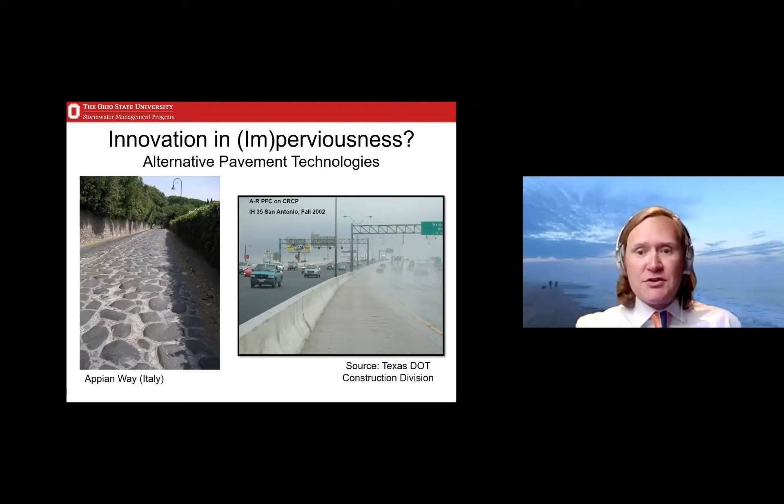So if we can think about ways to change some fraction of those into perviousness, that can do a lot of benefit for things like stormwater control. The picture on the right is an example of that, particularly for a highway. I promise you it is raining on both sides of this Jersey barrier. This is a porous friction course overlay, a porous asphalt overlay on a highway down in Texas, and then a standard asphalt highway on the right-hand side. This gives you an idea of some of the other ancillary benefits of porous pavements, related particularly to splash and spray and hydroplaning reduction.

What we're really going to talk about today are full depth permeable pavements, pavements that are entirely permeable and allow water to infiltrate through the surface, typically conveyed to a sewer network through an underdrain.

I've shown five different types here, all with slight variations in the maintenance that may be required. The two on the left are more uncommon, so I won't talk about them much today. For instance, turf reinforcing grids might give you a grassed parking lot that you actually have to mow, which is definitely dissimilar to a traditional asphalt or concrete surface.

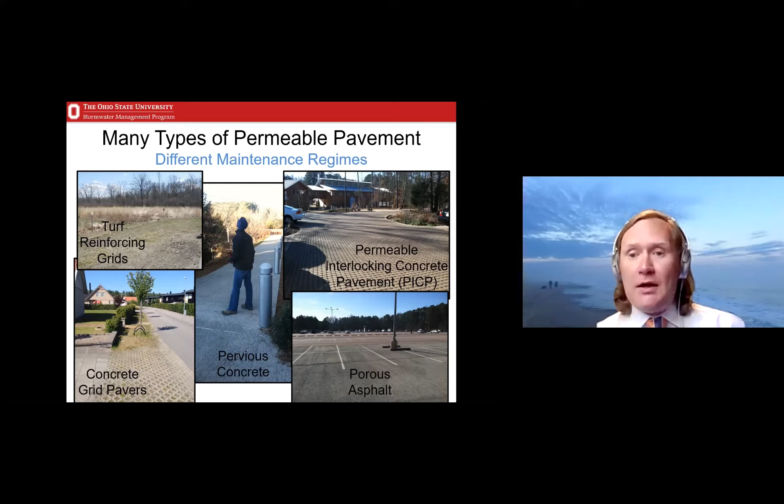But the thing all of these have in common is that they contain pore spaces that allow water to pass vertically through the pavement, as opposed to being transferred as surface runoff to storm sewers through inlets and pipes. A typical cross section for a permeable pavement is shown here.

Essentially, it's a porous surface of some sort. In this case, these are pavers with interstitial spaces in between that are porous. Porous asphalt and pervious concrete both have similar pore spaces. Underlying that are a series of aggregate layers, typically open graded aggregate layers, which allow for water storage.

There's tremendous porosity, typically somewhere around 40% in these aggregate layers, which can be used sort of as subsurface aquifers. As engineers, we can design for peak flow mitigation or for infiltration into the underlying soil and groundwater recharge. We can also get some minor evaporation occurring, and through this cross section we're also getting treatment of the water and improvement of water quality versus typical urban street corridors that are impervious.

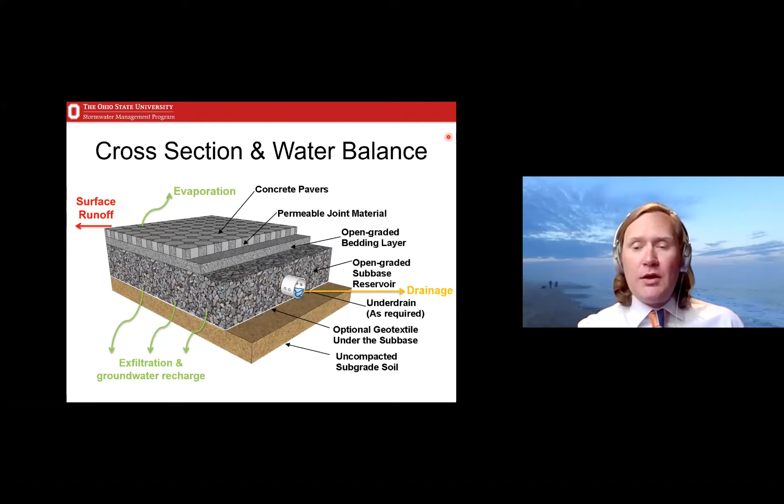The treated water often heads out of the underdrain. Here in Ohio we have primarily clay soils, so we almost always have an underdrain with these systems. But really the fraction of the runoff water balance we're trying to avoid is the surface runoff piece. Surface runoff starts to occur when the pore spaces in these systems get debris and material that prevent water from passing through them, which is what we're trying to avoid or remediate when we maintain porous pavements.

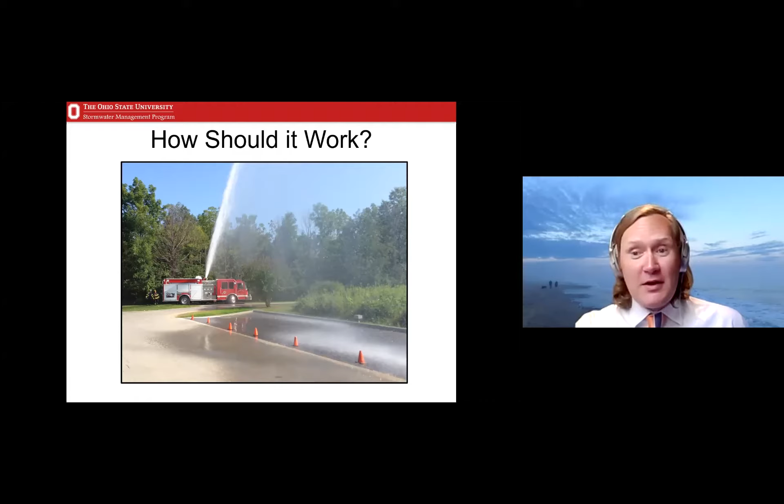So right after construction, how should these things work? We called up our local fire department at this permeable pavement site, and they were excited to use their hose and spray lots of water on our permeable pavement. In terms of infiltration rates and how fast water can move through the pavement, it's many hundreds of inches per hour, well above any typical rainfall intensity anywhere in the world. When newly built, these should pass water just about as fast as you can measure. Then with time, as I'll show you, these infiltration rates slow.

As you maintain them, you'd expect infiltration rates to increase following maintenance efforts. So what's the reason infiltration rates decline with time? If you think about this stormwater control measure, the system is acting as a filter for sediment. We have dirty runoff coming off a watershed draining onto the permeable pavement, and even rainfall contains some sediment. So even if it's just treating direct rainfall, you'll still get clogging over time from windborne dust and debris pushed onto the pavement.

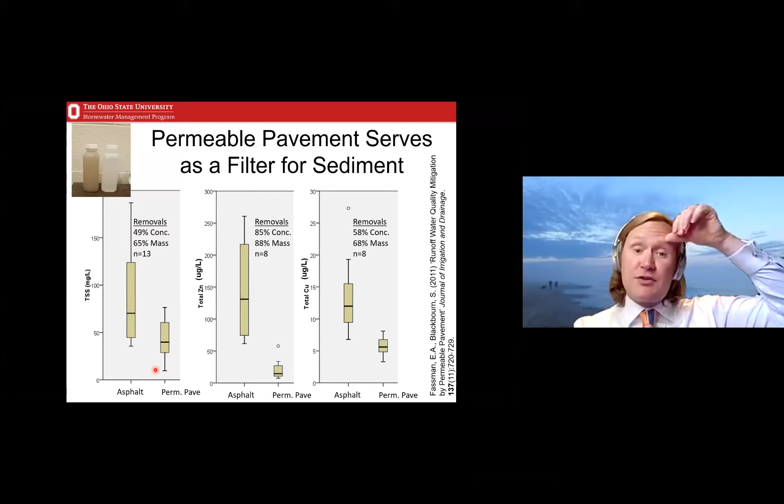You can see here some examples, from Elizabeth Fassman's work—she's a previous speaker on this series. This is traditional asphalt pavement, and then the effluent from a permeable pavement in Auckland, New Zealand that she monitored. You can see the effluent from the permeable pavement is much cleaner, because it's acting as a filter, trapping sediment in the cross section. That's naturally why we see a decline in infiltration rate as a function of time with all types of permeable pavements.

In summary, with time and without maintenance, the pore spaces in these porous pavements—be it pervious concrete, porous asphalt, or permeable interlocking concrete pavements like the bricks with interstitial spaces you see here on the bottom—regardless of the type, they will clog up over time.

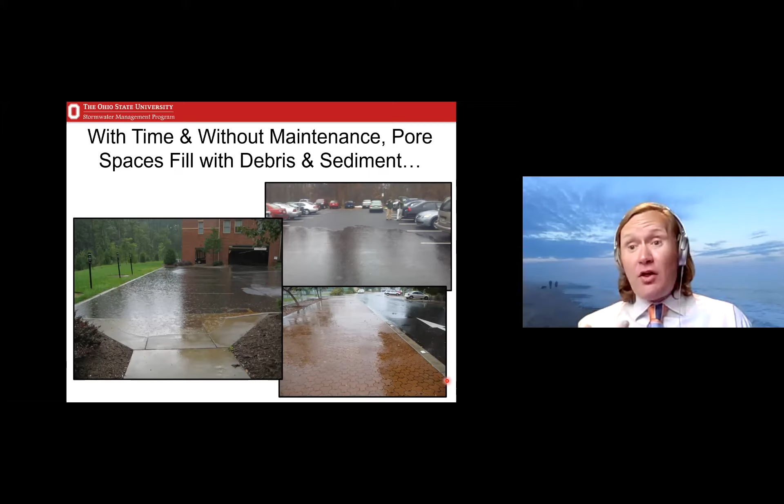And so we do need to have a proactive maintenance regime that is built such that we're able to ensure the hydraulic function of these systems over time. Because if we're relying on them for things like CSO control or SSO control, and they clog, then there's going to be all that water again heading to the CSO, for example.

So what I want to hammer on first is how design of these porous pavements affects performance. It affects how they function in terms of runoff reduction, particularly, and it also affects maintenance.

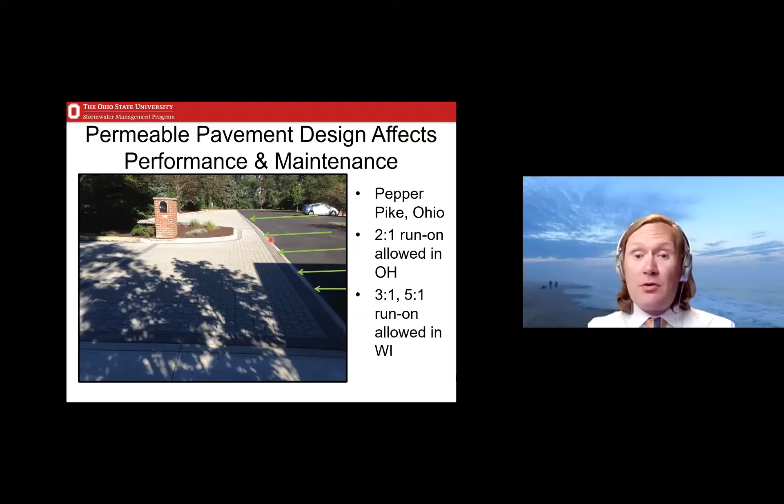So this is a picture of a typical porous pavement design here in Ohio. We have our permeable interlocking concrete pavement, which I'll abbreviate PICP, on the left here, and then a traditional asphalt portion of the parking lot. It's canted from right to left in this picture, so we have runoff entering onto the PICP.

We're allowed to have 2 parts impermeable to 1 part permeable here in Ohio, and that's what's called our run-on ratio. So a 2-to-1 run-on ratio means 2 parts impermeable to 1 part permeable. Other places in the country go even higher - Wisconsin can go up to 3-to-1 or even 5-to-1 in certain cases.

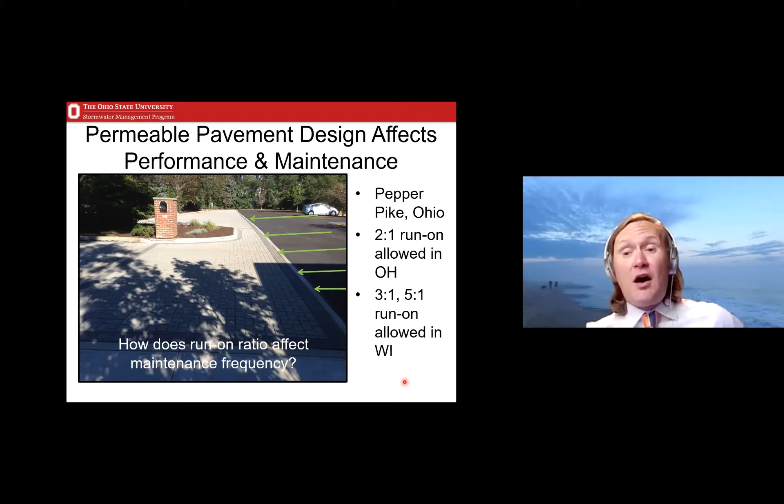And obviously, as you push more and more water onto the pavement, if that runoff contains sediment, which we all know it does, that's going to affect the rate at which these pavements clog. So this run-on ratio is of major importance to maintenance frequency, and I'm going to touch on how that affects things in just a few slides.

These 4 sites, we instrumented and did intensive monitoring of these sites. Actually, back during my PhD work, we collected the water balance on these systems over 18 months of monitoring and about 75 to 80 storm events. So we really had a good idea of where the water was going and how the systems were functioning.

And so, to jam a good portion of my entire PhD into 2 slides, here we go. I'm going to summarize the water balance for these 4 sites: Perkins Township, 2 sites at Willoughby Hills, and then Orange Village here at the bottom. And what I really want to hone in on as the primary design factor of interest is this idea of run-on ratio.

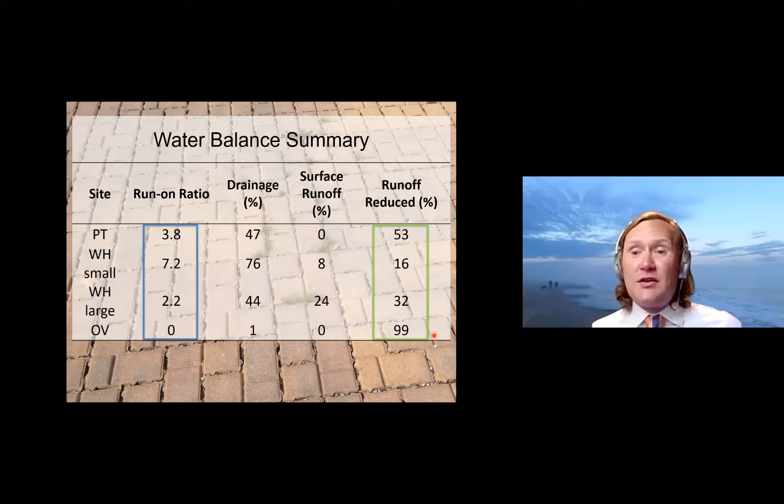What you can see is that Orange Village was only treating direct rainfall, so had a run-on ratio of 0. And what that directly resulted in was 99 out of 100 raindrops that fall from the sky being abstracted or reduced and kept out of the storm sewer network. So we had a lot of infiltration into the underlying soil and evaporation back up into the atmosphere.

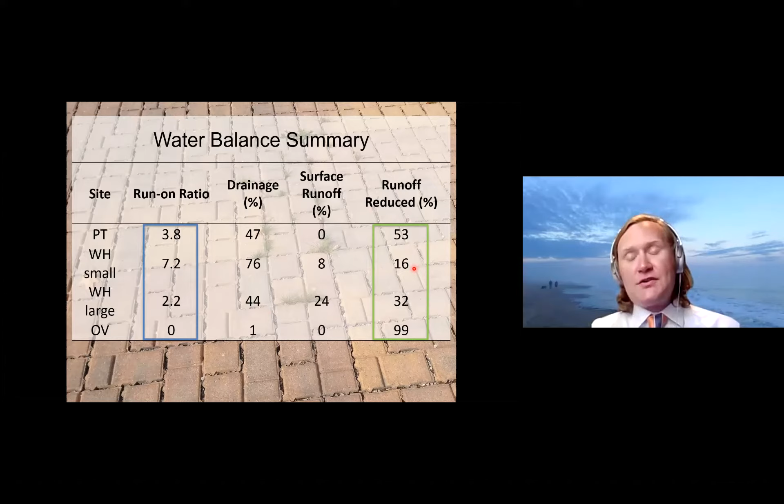The other thing you'll note is as the run-on ratio increases to 2.2, to 3.8, and then to 7.2 at the highest run-on ratio, you can see there's concurrent decreases in the amount of runoff that we've reduced. So as that ratio goes higher and higher, typically the runoff reduction is going to go lower and lower, just because we're putting more water through the system and hydraulically taxing it more.

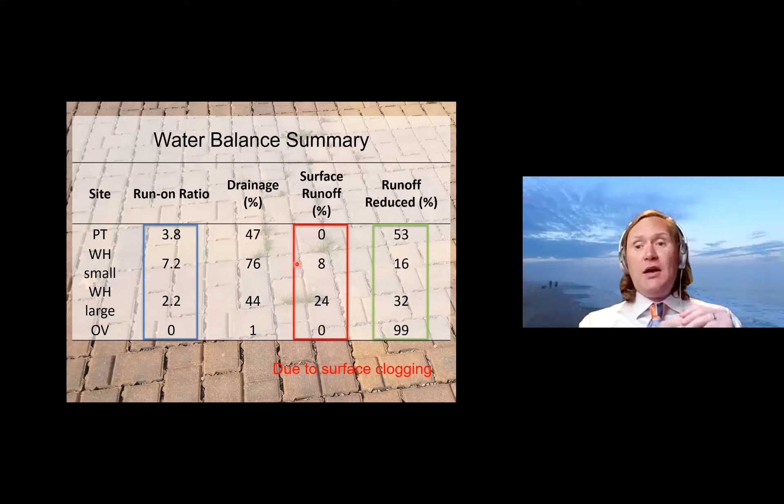The other thing that happens due to surface clogging is that we end up with more surface runoff as a function of the total overall water balance across all of the rainstorms that we monitored. In this case, we had up to 1/4 of the runoff at one of our sites that left the pavement as surface runoff. And that's the part of the water balance we really want to try to avoid because it's not really being treated - it's acting as an impermeable pavement at that point.

So I can come back and touch on run-on ratios and designs of these systems a little bit more in the questions if there's interest. There are some other interesting findings here that I won't touch on, just in terms of keeping on time.

I wanted to make the point about what happens if you practice gross neglect with these systems over a long period of time. These data were collected with folks over at Luleå University of Technology in northern Sweden, about where Sweden and Finland come together, way up near the Arctic Circle. These were two porous asphalt pavements we studied, one in Gammelstad and one in Haparanda, built back in the mid-90s, so they're quite old at this point.

You can see they had measured how fast the water moved through the pavement, what we call surface infiltration rate, at construction, roughly 500 to 1,000 inches per hour. They measured it at several points throughout the lifespan of each pavement, and these two points were when I was there for the testing. There's not a lot of data here, but when you fit a trend through this, it looks linear, but in fact this is a log scale on the y-axis, so we have an exponential decay happening in surface infiltration rate. If you really want the equation and want to get super nerdy, you can look here at this particular equation.

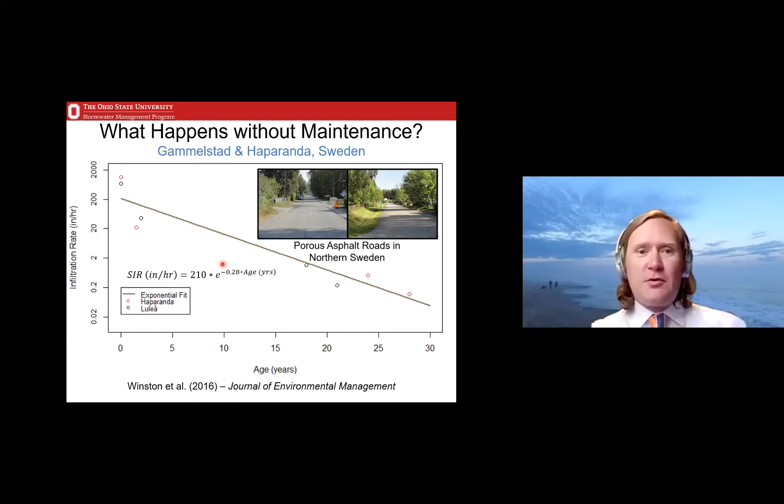So over time, if you don't maintain them, essentially what I'm trying to say with this slide is the infiltration rate will go nearly to zero. That's what we found. By the time we were there, we were well less than 1 inch per hour of surface infiltration rate. And measuring that is best done by a graduate student with lots of time on their hands, not someone with lots of other things to do. It's quite a boring thing to sit and watch, if you can imagine.

One other case study I want to give you relating design to performance is this Meijer store we worked on here in Columbus more recently. Traditional Meijer, very much like what you might have in the Twin Cities. We retrofitted a bioretention cell in one part of the parking lot, the watershed shown in green, and the bioretention cell here in the dot. Adjacent to that, a permeable pavement with a similar watershed draining to it, shown in purple.

The thing that was really interesting about this particular site is that we had an extremely high run-on ratio, 27 to 1. I don't often do this, but I'm going to beg right now. I'm going to beg you to never, ever push the run-on ratio this high, because this just flat failed. I wanted to show you there is a point at which you can push things to the point of failure, and we kind of did it in this particular study.

So we also collected data on maintenance at this site, in this case over the first 18 months after construction. You can see our surface infiltration rate data. We collected these every 3 months with the exception of the winter period. Again, as we look at the decline in infiltration rates here, this decline is again approximated by an exponential decay.

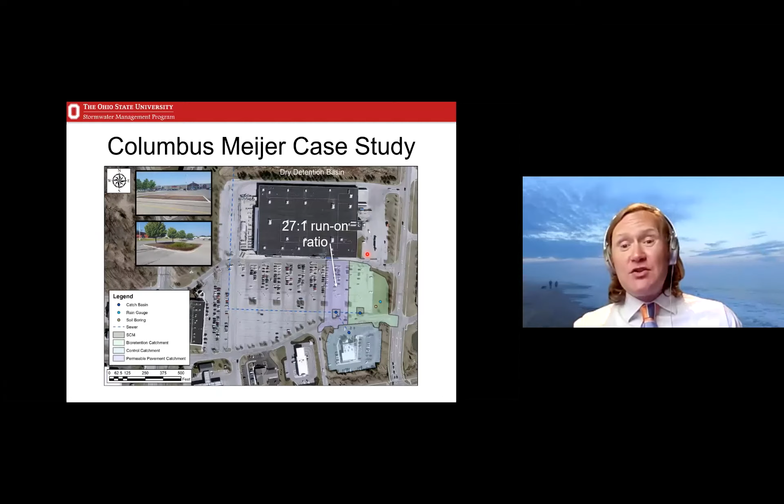In this case, the exponent on the exponential decay is quite a bit higher, and we think that's related to this much, much higher run-on ratio of 27 to 1. The porous asphalts in northern Sweden were just treating direct rainfall, so they clogged much, much less quickly. But this site really had clogged to the point of being fairly heavily clogged, less than 10 inches per hour within 18 months, and we'd done no maintenance over this period.

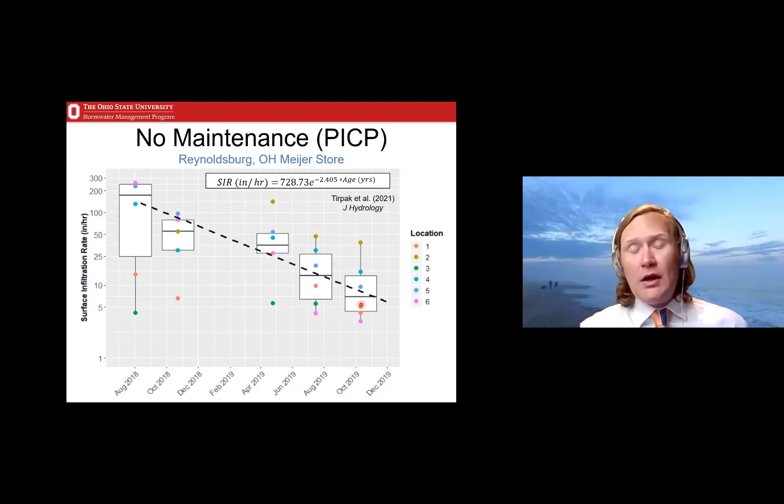So you might ask, how does this clogging affect the performance of the pavement? By the way, we've seen exponential decays in our research in porous asphalt and in permeable interlocking concrete pavements. John Sansalone down at University of Florida has seen it in pervious concrete as well. So we think this exponential decline is the way to model this if you're interested in modeling clogging of porous pavements.

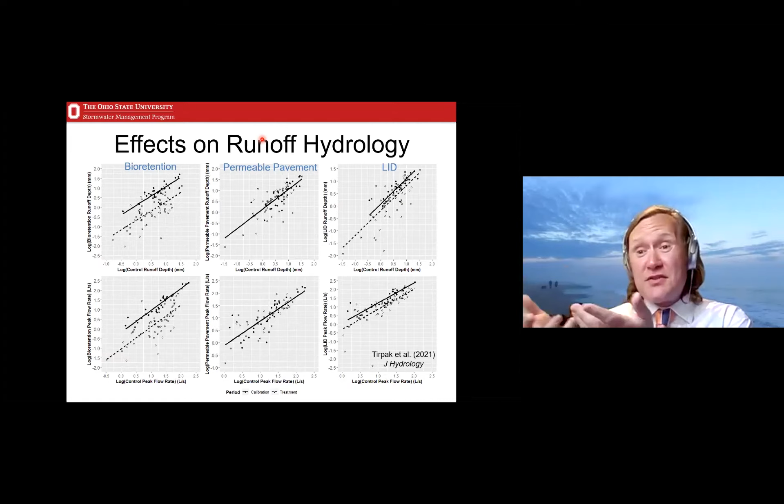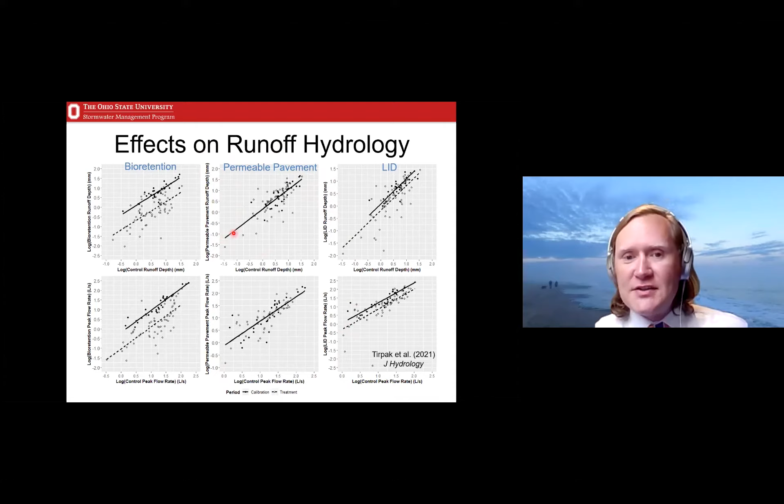Those of you who have been looking at the permeable pavement insets here, you're like, where did the dashed line go? There's no dashed line. In fact, the dashed line sits right underneath that solid line. In other words, there was no effect whatsoever over the first 30 months after construction. We could not tell that the permeable pavement was there. Hydrologically, it made no difference because the run-on ratio was so high, the system clogged very quickly, and it just was unable to function. So again, please do not push the run-on ratio this high. Please, please, please, please, please. It's not worth it. It will clog very quickly.

All right, so based on this and some other studies that I'm not going to cover for lack of time, we've come up with a recommended schedule of routine maintenance, a scheduled basic maintenance of porous pavement based on a lot of these studies. Most of the design guidances out there from various states recommend a static maintenance frequency - once a year, twice a year, 4 times a year - regardless of what the engineer chooses as the particular design. What we really recommend is relating this to run-on ratio because we think this is the critical factor for how fast these systems clog.

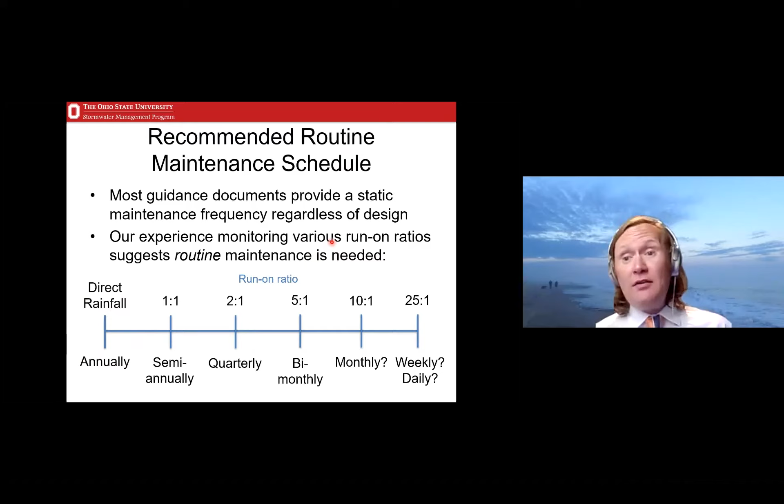It's the primary factor. So for direct rainfall, we think maybe annually; at 1-to-1, maybe twice a year; at 2-to-1, quarterly. I'm going to be honest with you, beyond 2-to-1, I start getting nervous. And as you go further right on that scale, I get very nervous. The maintenance burden is going to be so high that I just would not recommend that you go there. So that's why I have question marks out there. I'm not sure how frequently, but it's going to be way more frequently than you want as an owner, put it that way. Another thing we've looked at is other stimuli for clogging.

There's obviously spatial heterogeneity within a permeable pavement. There's areas that have overhanging trees. There's areas that receive concentrated runoff. There's all sorts of different factors within a particular permeable pavement.

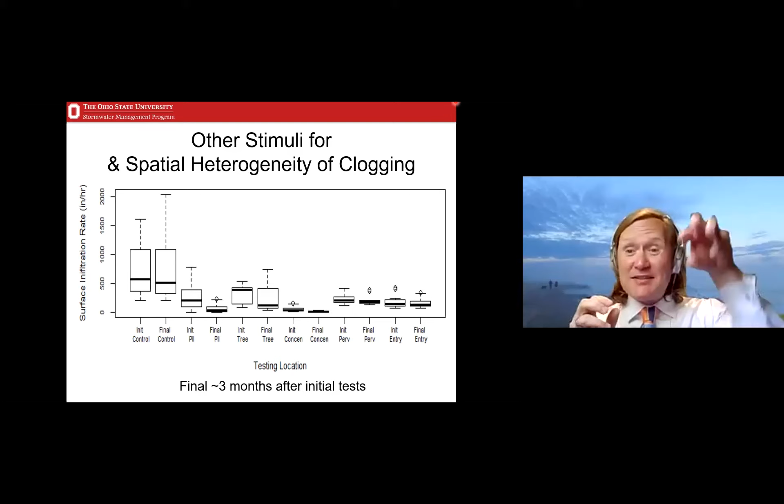So what we did across a number of sites is we did testing on, let's say, Julian day 0, and then we came back 90 days later, one quarter of the year later, and did testing at those exact same locations across a number of porous pavements. We had control locations where we expected there really weren't any stimuli for clogging. We had areas underneath trees, areas receiving concentrated flow, and areas that received pervious contributions from pervious areas, like parking lot islands and the like that might be mulched or might have bare soil.

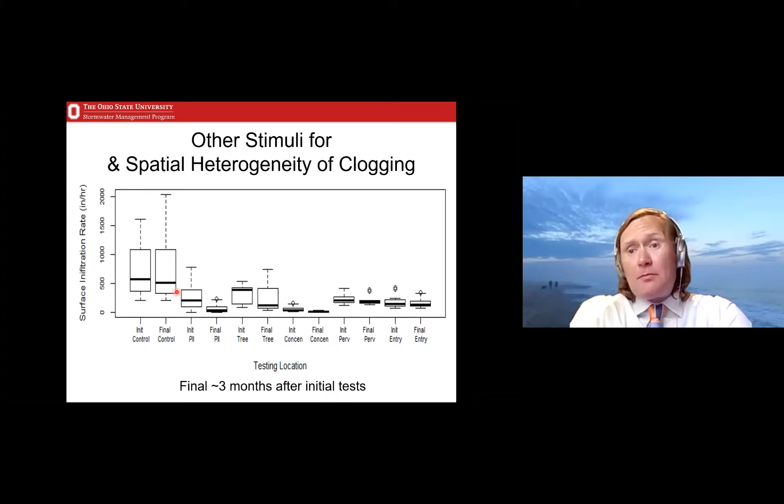What you can see is from the start to the end of that 90-day period, the control locations really didn't clog. There was a slight reduction in median surface infiltration rate, but they didn't clog much at all. Where we saw significant loss of surface infiltration rate were under trees, areas that received concentrated runoff coming onto the pavement, areas receiving runoff from pervious locations like landscaped areas, and at the PII, or the permeable-impermeable interface - I'll mention that in just a second.

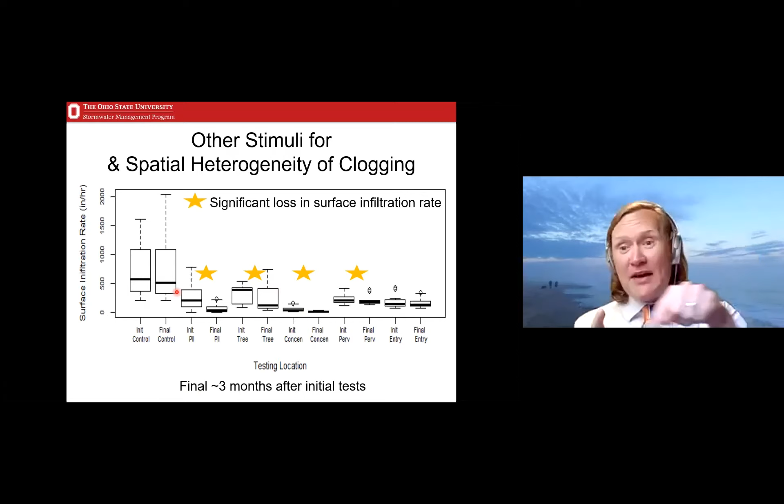So what I want to say here is these are areas that might take a little bit more focused maintenance. If you're going to come out and maintain twice a year, during those maintenance efforts, underneath trees, you may want to make 2 passes with your street sweeper as opposed to 1. So those are the types of changes we might need to make in these small areas that might clog a bit more quickly. Overhanging trees, areas along curbs, where there's landscaped areas adjacent - those are areas where we've seen definite clogging at a quicker pace than the average across the porous pavement lot, across the parking lot.

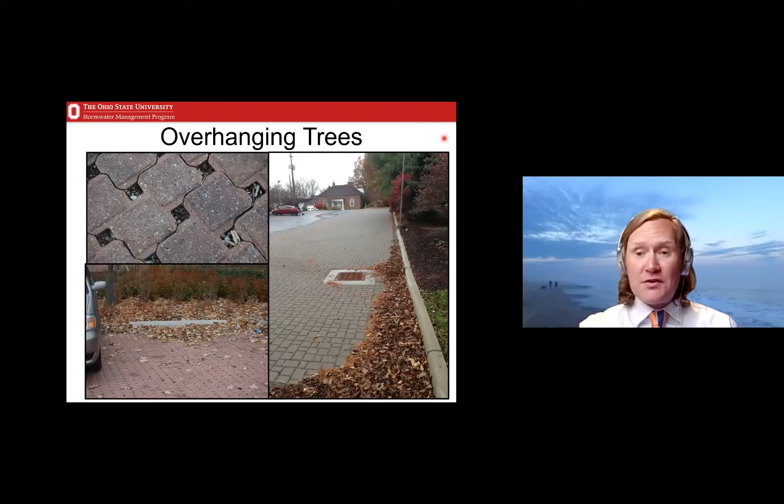Unstable catchments upstream, so outparcels and active construction areas are difficult for porous pavements. After those areas have been vegetated or construction is completed, you're almost certainly guaranteed to need restorative maintenance at that point—major maintenance at that point.

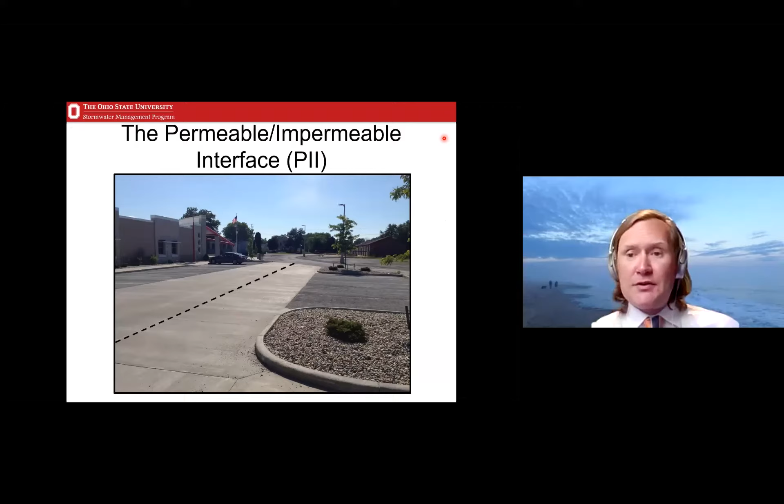The permeable-impermeable interface is another point where we see higher maintenance needs spatially within a porous pavement. This is a lot in Perkins Township near Sandusky. You can see in the drive aisle of this particular parking lot there's regular concrete, crowned as you typically do with the road, so the runoff is going to go off to either side into the pervious concrete in the parking stalls. What ends up happening is that this permeable-impermeable interface ends up acting sort of similar to a forebay in a pond, a bioretention cell, or a wetland.

It's where all of the sediment accumulates, it's where that water first starts to infiltrate, and so the clogging will tend to migrate as a function of time. This area is going to be an area of higher maintenance needs spatially. You can see an example of this here in a picture during a rainstorm, and again, you can see the permeable-impermeable interface and the amount of sediment that's accumulating in the joints between the bricks, just qualitatively.

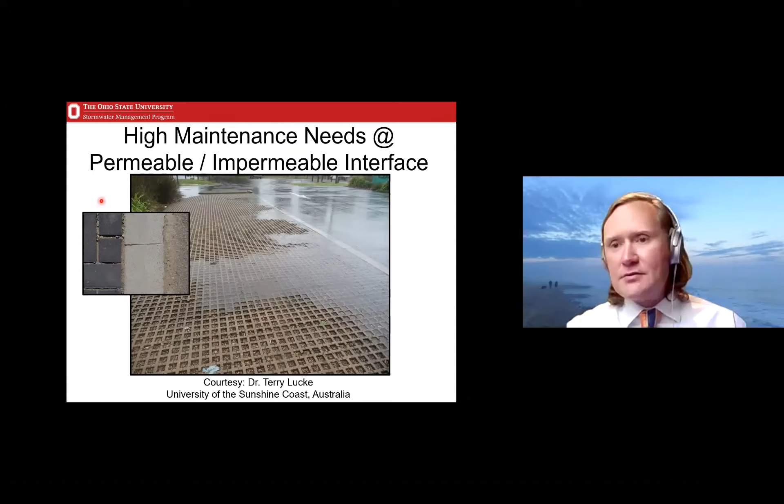Concentrated flow paths are another one to watch out for. This is the retrofit at the Meijer store I mentioned earlier, nine stalls of permeable pavement. Obviously there were existing grades to the asphalt parking lot here, and you can see there's a concentrated runoff path that enters the pavement here. Certainly this part of the pavement was really hammered and quite quickly clogged, to be honest. So those concentrated flow paths are areas where you might have higher maintenance needs.

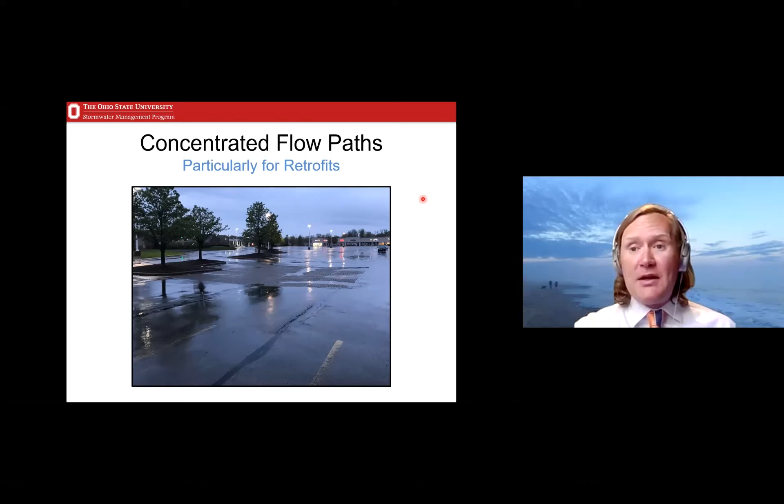So certain areas are susceptible: the landscape-hardscape interface, the permeable-impermeable interface, as I mentioned. Really it's a question of what level of service do I desire as an owner, or as someone who might be regulating the maintenance of these porous pavements. As civil engineers, we think about level of service as our desired goal for how we want a system to function. So we really need to collect some hard and fast data in order to understand and plan for level of service.

So how do you measure how water flows through porous pavements? There are a number of quick and dirty methods that I'll show you in just a second, and then there are a couple of different infiltrometers out there that can be used to measure how fast water moves through a pavement.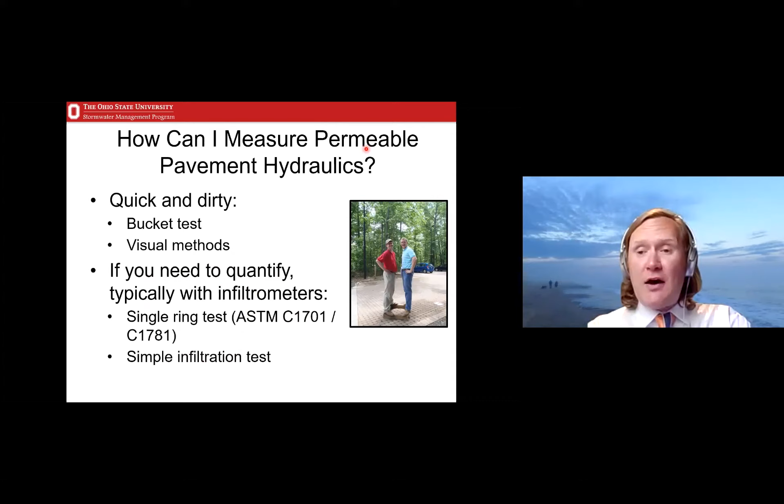The first thing I would recommend, honestly, is watching these systems during a rainstorm—going out behind your windshield and looking at how they're functioning. If you see surface ponding during a rainstorm, that's an indication that you need not routine maintenance but restorative maintenance. You are at the point where your pavement hydraulics have failed, or are on their way to failure, and you need to get out there and do some restorative maintenance.

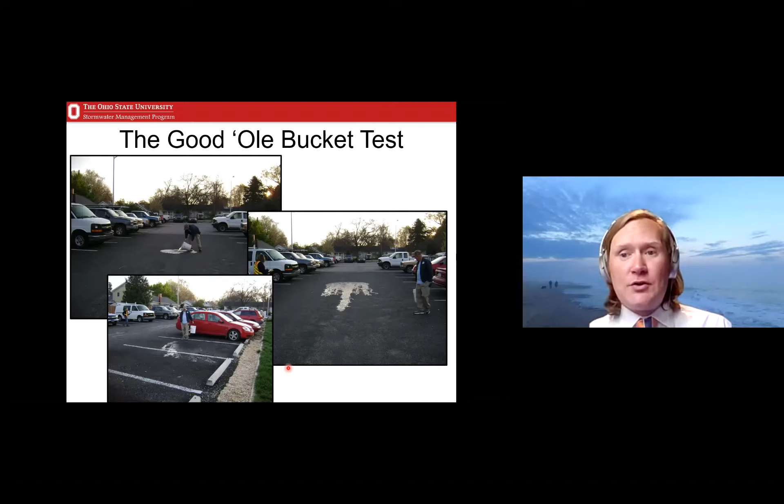A bucket test, if you are there during dry periods, is another way to handle this. It's a 5-gallon bucket of water, pour it quickly onto the pavement—it should all infiltrate very quickly. If you start to see runoff like this or like this, those are indications that you're probably going to need to schedule some restorative maintenance in the near future.

If you want to quantify surface infiltration rate, there are a couple of methods out there. The American Society for Testing and Materials has a methodology—either C1701 for pervious concrete or C1781 for PICP. These essentially involve taking a 12-inch diameter ring, affixing it to the pavement with plumber's putty, pouring in 5 gallons of water, and keeping about a half-inch of constant head on the pavement surface.

This can be extremely challenging if you have a very high surface infiltration rate—nearly impossible, to be honest. And on the other end of the spectrum, if you have a heavily clogged pavement, these tests can take a very long time to run—best handled by a graduate student with lots of time on their hands, 30 minutes or more if the system is heavily clogged.

And again, the surface area that you're testing is only 12 inches in diameter, which is quite small and maybe not super representative of a large permeable pavement.

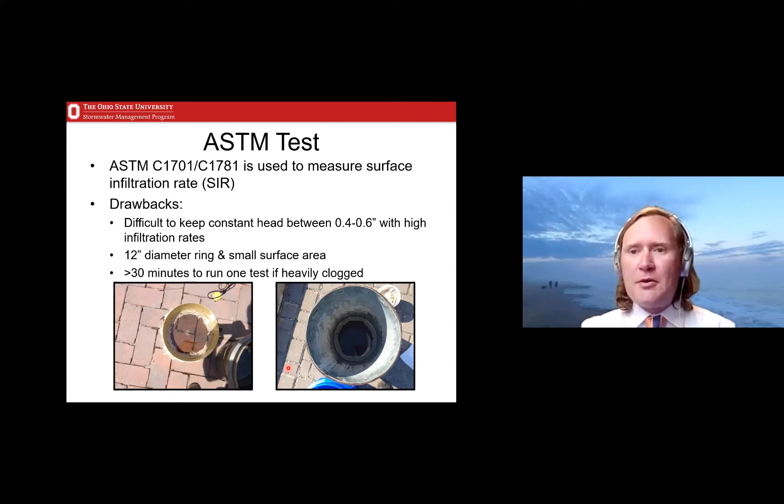So we came up with the simple infiltration test, which originally we called the shallow head infiltration test, but the acronym didn't quite work out, so we went with simple infiltration test instead. Essentially, you take a 2x4 wall stud, an 8-foot wall stud, cut it into equal sections and screw it together. Then you apply the same plumber's putty, force it down onto the pavement, and pour 5 gallons of water into the infiltrometer.

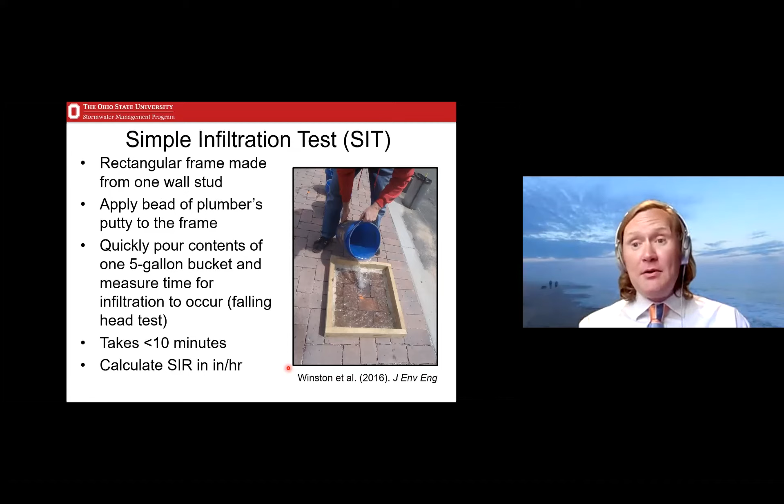Measure how fast it infiltrates, and from there you can get a surface infiltration rate for your pavement. The surface area of this test is about 4 times larger than that for the single ring test I showed you on the last slide, so the test takes about 3/4 less time to run. That's a huge benefit in terms of being able to do a number of these quite quickly on a single permeable pavement.

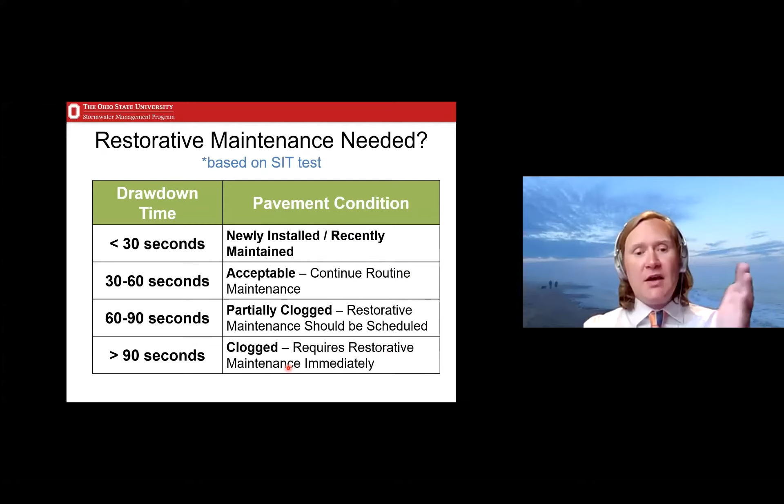So what we generally recommend is this: if it takes less than 30 seconds for the simple infiltration test to infiltrate the entire 5 gallons of water, it's like new, it's working fine, continue your routine maintenance as we talked about earlier. 30 to 60 seconds, routine maintenance is still fine, but we're getting closer to needing restorative maintenance. 60 to 90 seconds, we're probably talking about bringing out some of the bigger guns for restorative maintenance. And greater than 90 seconds certainly means it's clogged.

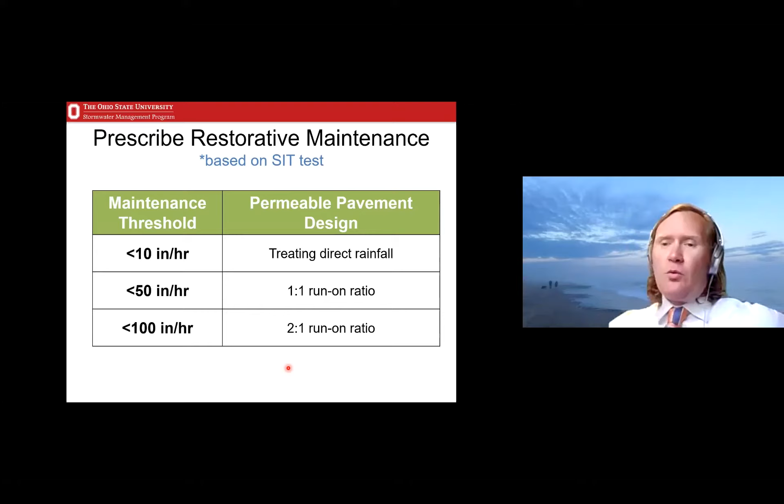Thinking about this as a function of design, we've also considered what minimum infiltration rates we'd like for permeable pavements. We could have half an hour discussion just on this, but what we're currently recommending is less than 10 inches per hour for permeable pavements treating only direct rainfall -- that's the point at which we need to start restorative maintenance. For a 1-to-1 run-on ratio, we want a minimum of 50 inches per hour surface infiltration rate, and for 2-to-1, we want 100 inches per hour or more.

That's because when runoff enters the permeable pavement, it has a velocity, unlike direct rainfall which has no velocity. So you need a higher infiltration rate to essentially suck that water down into the cross section of the permeable pavement.

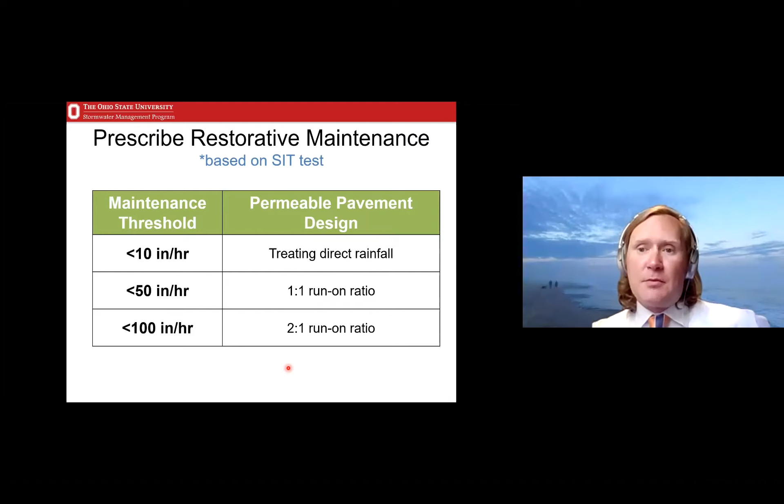So, some rules of thumb on measurement of surface infiltration rate: we think you should use the simple infiltration test about once a year to establish your restorative maintenance needs -- do you need to do restorative maintenance or not. That's essentially what we're recommending you use the simple infiltration test for.

What we recommend is about 5 surface infiltration rate tests, these wood square tests, per half acre of permeable pavement. These take about 5 to 10 minutes each, so it's not a tremendous investment in time. If less than 20% of the lot comes back as clogged, we say we're fine -- let's test again next year and see whether we need to bring out some technique for restorative maintenance.

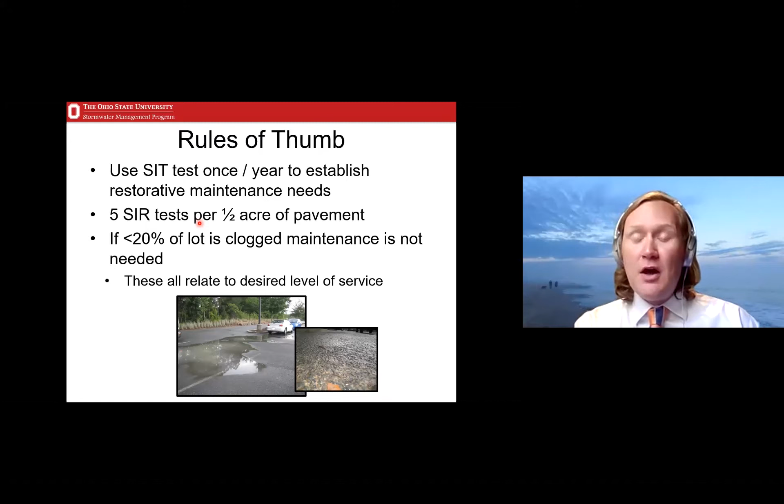Obviously, all of these recommendations and rules of thumb can be modified depending on your desired level of service. So if you really, really want this permeable pavement to function, maybe this is 5%, and maybe this is 20 tests per half acre. This is a sliding scale as a function of what your desired level of service is.

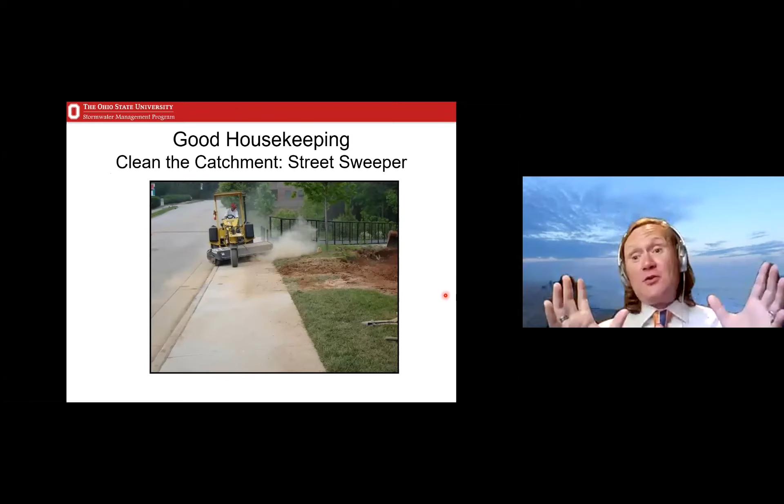So you're like, all right, you spent the first 3/4 of this talk showing me that maintenance is needed -- let's see what actually works out in the field for maintenance of permeable pavements. Good housekeeping: first and foremost, absolutely keep your watershed clean, particularly if there's construction.

Street sweeper is the best method for that -- keep the sediment off of the permeable pavement. Blowing off leaves and debris, particularly in the autumn from deciduous trees, acorns, etc., is also important to keep them from being ground into the porous pavement.

One of the sidebars before I show you some of the maintenance techniques is really trying to understand where in the cross section these permeable pavements clog. This is a slide courtesy of Bill Selbig, who I know has spoken with y'all before in this series. We've actually done a little bit of work, as I'll show you at the end of this talk, on where in the profile of the pavement it clogs.

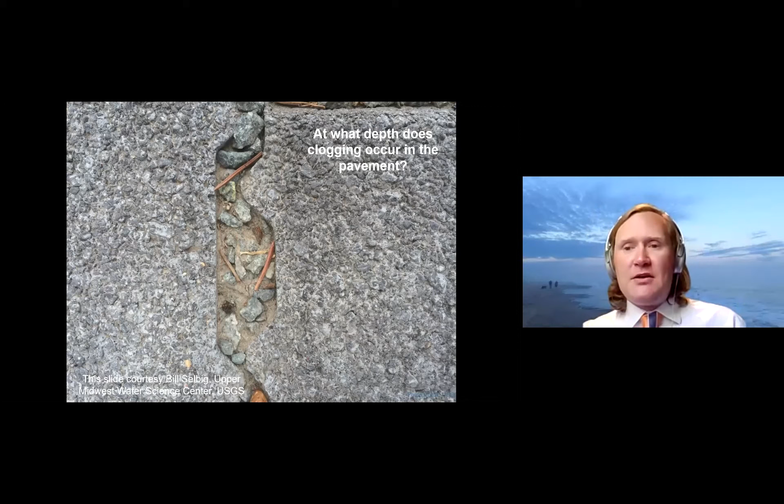What's generally known and accepted in the literature is that these systems clog in the upper 1 inch of the cross section. That's nice, because we can get some technique in there to remove that clogging material. The deeper it gets, the harder it is to remediate. So I'm going to come back to this point of 1 inch depth of clogging a couple of times as we go through these maintenance techniques.

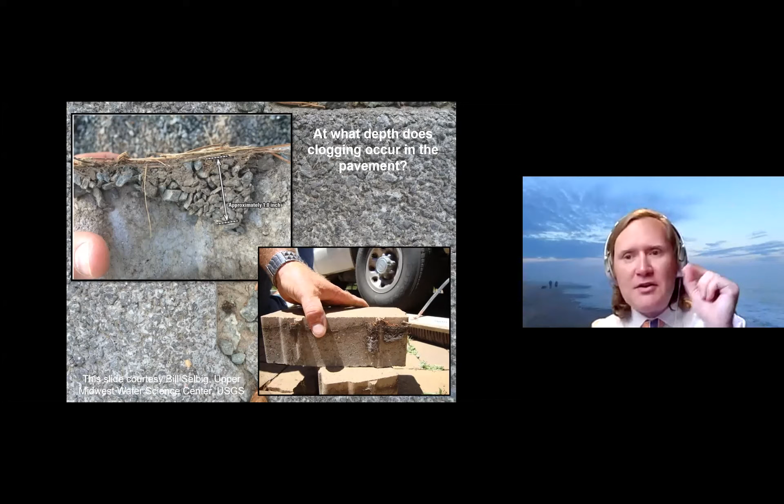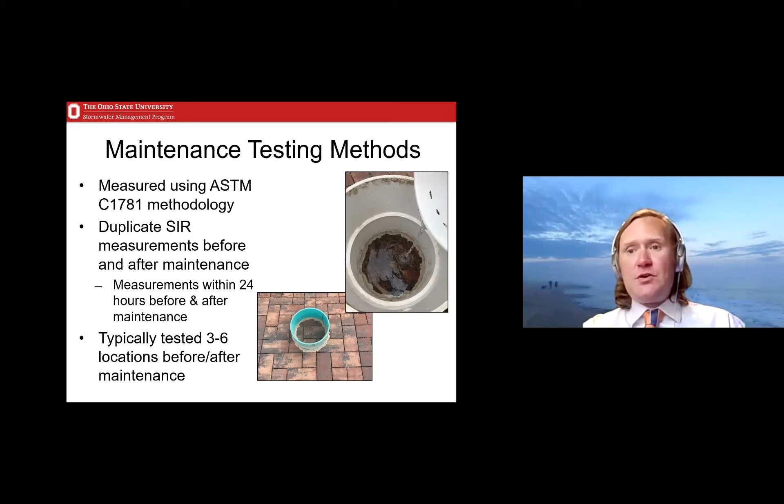We tested a bunch of maintenance techniques using this ASTM 12-inch diameter ring. We measured existing pavement hydraulics at 3 to 6 locations on each permeable pavement before maintenance, then generally that afternoon did the maintenance, and the next morning came out and did post-maintenance infiltration testing at the exact same location, so we could look at a particular location pre versus post. You'll see a number of box plots in the next slides that compare pre to post, and these were the methodologies we used to collect those data.

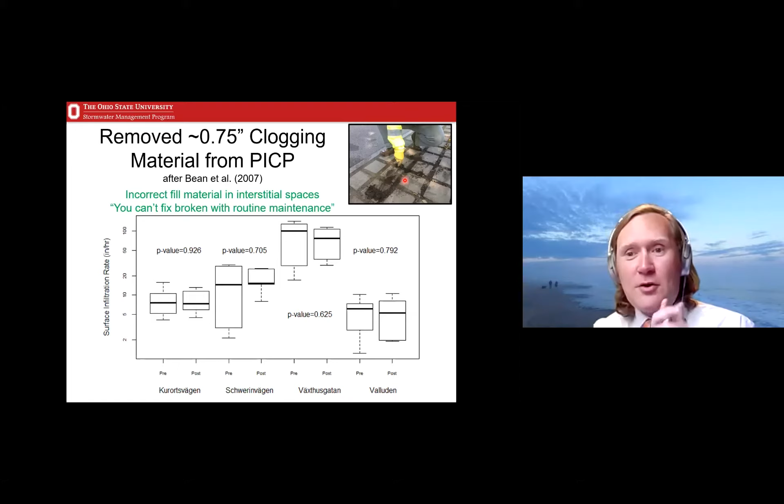So what happened? Well, if you look at this picture, you're like, that doesn't look like gravel, that looks like soil. And in fact, that's because it is soil. It was built wrong. All of these 4 streets had soil put into the interstitial spaces as opposed to the typical gravel that goes into these pore spaces between the bricks. So if you build it wrong, you will not be able to do routine maintenance and fix it. This is an error in not doing construction oversight as you're building these systems.

We also did work in Sweden looking at vacuuming—handheld vacuuming in this case as a proxy for larger vacuums—pressure washing, and the combination of the two, which I'll call VP, not vice president, but vacuuming plus pressure washing. We did this in Luleå, and vacuuming, pressure washing, and the sum of the two in Haparanda. These were on the porous asphalt roads I showed you earlier in Sweden, quite old. We pressure washed at a 30-degree angle; obviously you don't want to pressure wash straight down as you'll push the clogging material deeper into the pavement. What we found generally is that the vacuuming treatments did significantly improve the surface infiltration rate. They worked, but anything with pressure washing was significantly better than vacuuming alone.

One thing I want to be clear on is I think this is the direction a lot of the technologies for permeable pavement maintenance are going: the combination of vacuuming and pressure washing on something like a gator or golf cart sized vehicle to do this maintenance on large areas.

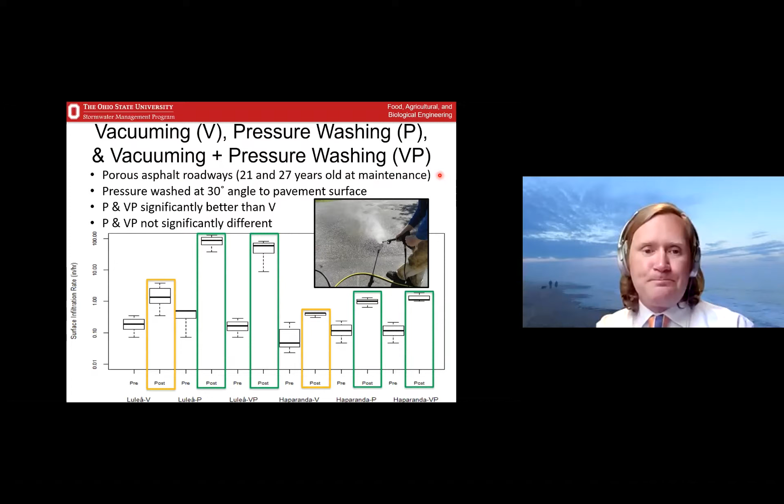We also tried milling porous asphalt, with an M. If you look at your keyboard, since we're all virtual today, you could see that if you replace the letter M with the letter K, you might get a slightly worse word than milling — you'd in fact get killing. So here's my best email chain I've ever been involved in: 'Gentlemen, I have bad news. I stopped by Gammelstad 10 minutes ago and the killing had not been completed. I will see you tomorrow at the building at Luleå Technical University. Cheers, Ryan. The killing, quite dangerous in Gammelstad at nighttime.' Autocorrect on my iPhone switched milling to killing. Luckily, before I got this email, I had made it back through TSA from Sweden to the US without any search of my person for sending emails about killing when I meant milling.

So what we did was we milled the porous asphalt streets to 2/10 of an inch, 1/2 inch, and 1 inch depths to try to see how deep we needed to mill the porous asphalt before we saw improvements in surface infiltration rate.

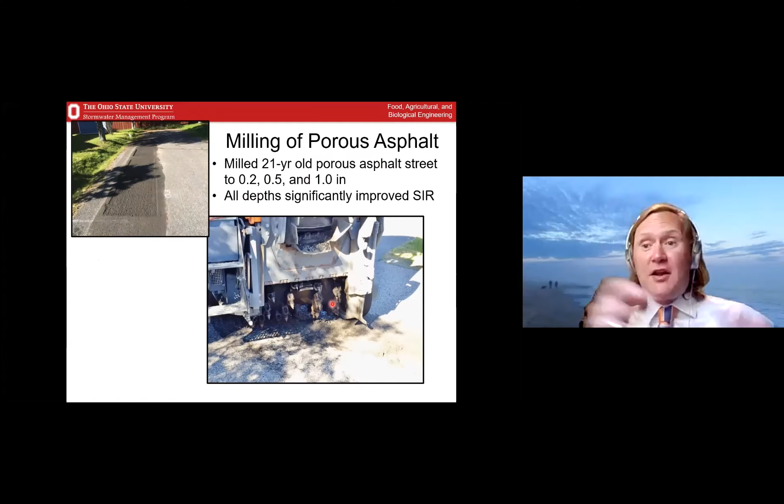If you've never seen a milling machine, this is what it looks like. It's essentially a large drum with teeth on it that grinds up the pavement.

Pre-maintenance, the system was heavily clogged. We took off the upper 2/10 of an inch and got back about 80% of the newly constructed surface infiltration rate in 1994, taking off the upper 2/10 of an inch of pavement. That does suggest the vast majority of clogging is occurring right near the surface.

1/2 an inch was slightly better. 1 inch depth got us to within spitting distance of brand new, within 10% of brand new. So we do think that in the upper inch of porous asphalt we are seeing the vast majority of the clogging material accumulate, which is a good thing for being able to remediate that clogging material.

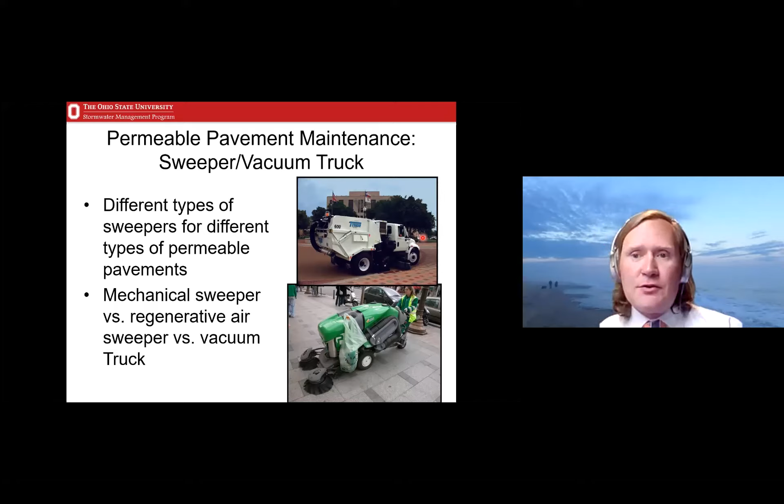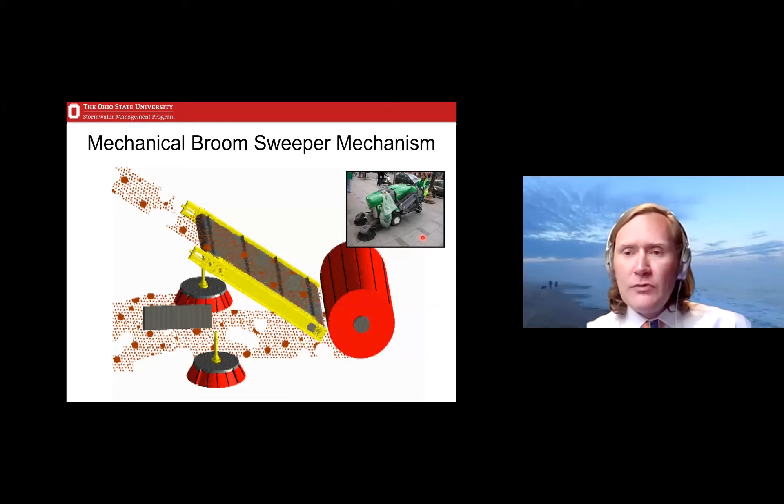We've also looked at a number of different sweepers, which run the gamut from just having bristles to having some sort of suction, as I'll show you in a second. Obviously we've all seen traditional broom sweepers. These typically have bristles and a drum that sucks the accumulated debris and material up into the hopper.

We've also tried regenerative air street sweepers. These are interesting devices in that they have a blower that blows air down onto the pavement surface, and then suction on the other side of the boom underneath the truck, to lift material off the pavement surface and then suck it up.

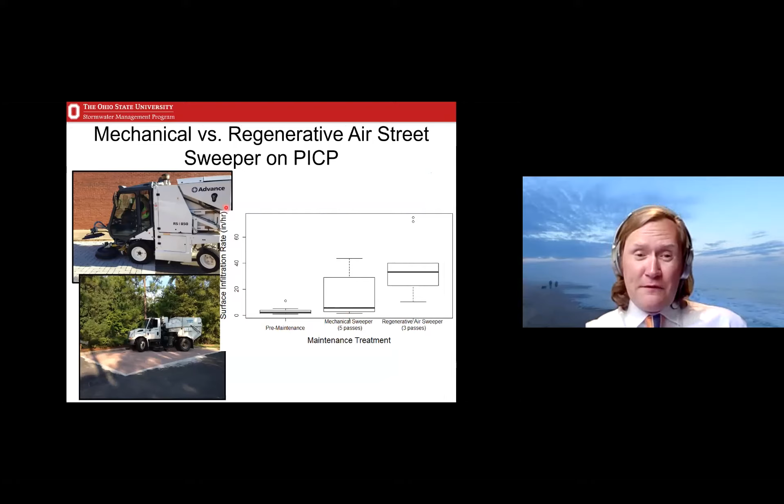At a highly clogged test site in North Carolina, this is pre-maintenance. After we came through with 5 passes of a mechanical street sweeper, we roughly doubled the surface infiltration rate. So that mechanical sweeper does work to some extent, particularly for preventative maintenance, but it's not going to restore pavement hydraulics if it's heavily clogged.

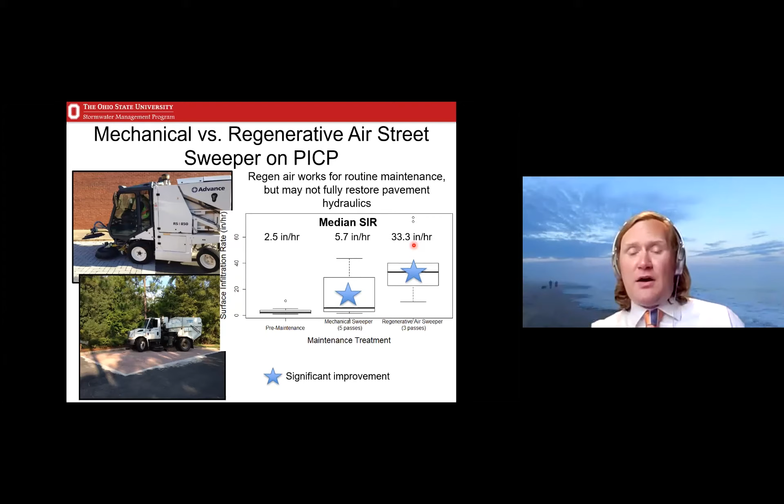So regenerative air and standard bristle street sweepers work for routine maintenance, but they're not going to fully restore the pavement. That's because, particularly for the bristle street sweepers, the bristles can't get down into the pore spaces. They get stuck on the surface, so they're only able to remediate the surface clogging material.

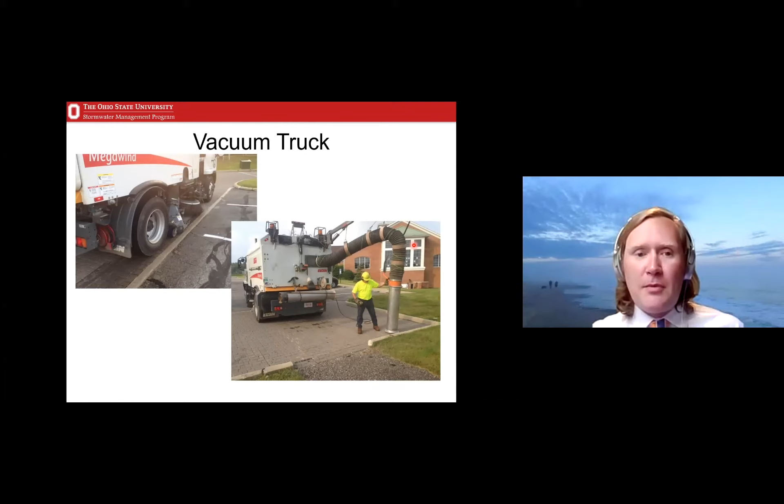We've also looked at using a vacuum truck, which is like your home vacuum on steroids. The Elgin Megawind is one example, but there are many others on the market. These systems work quite well for restorative maintenance, with a tremendous amount of suction that can lift an inch or two of material out of the pavement.

I want to close with some thoughts on maintenance testing on PICP that we've done more recently. We've tested just standard pressure washing, which does work quite well. The only problem is it kind of translocates or moves the sediment plume around, so if you don't have a way to suck up the material that's been moved by the pressure washer, this is not going to work all that well.

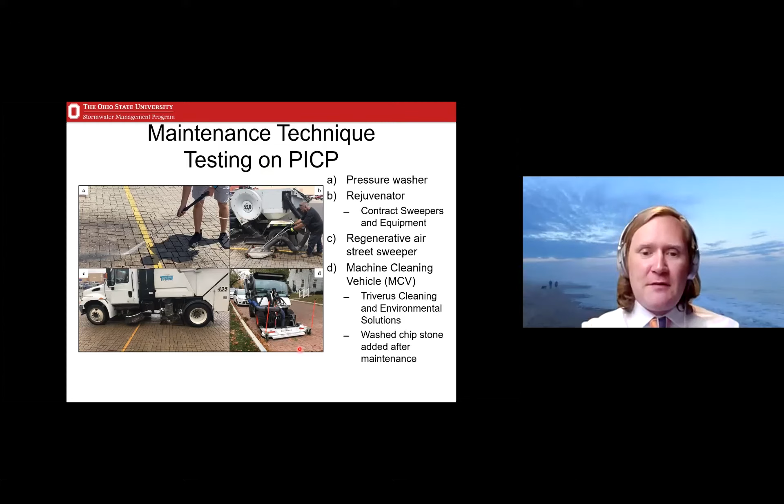Some techniques I think have more interest are this rejuvenator and this machine cleaning vehicle. These both combine high pressure washing and suction, in this case from a regenerative air street sweeper that this is attached to, and in this case from a vacuum that's inherent to this Gator type vehicle. I think these types of machines are the way the technologies are heading for permeable pavement maintenance.

We did find that pressure washing from pre to post maintenance roughly doubled our surface infiltration rates. But if you don't have some sort of vacuuming to go with that pressure washing, there's no way to remove that dirty water from the pavement. So I wouldn't recommend pressure washing on its own. You do need some sort of wet dry vac to vacuum up the dirty water.

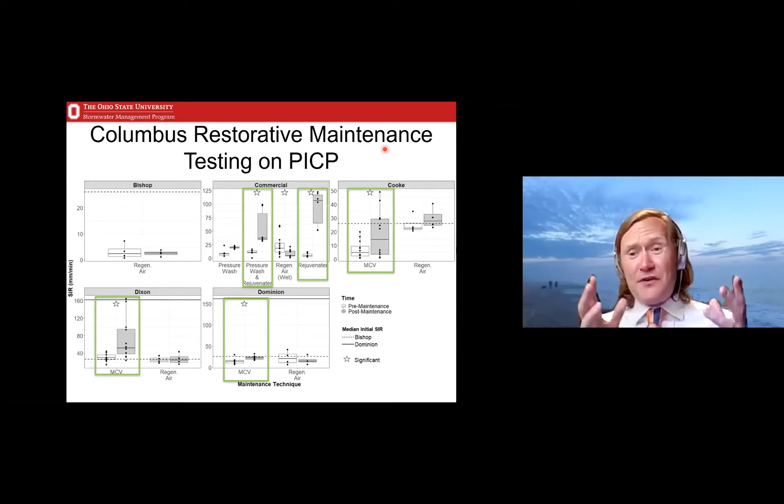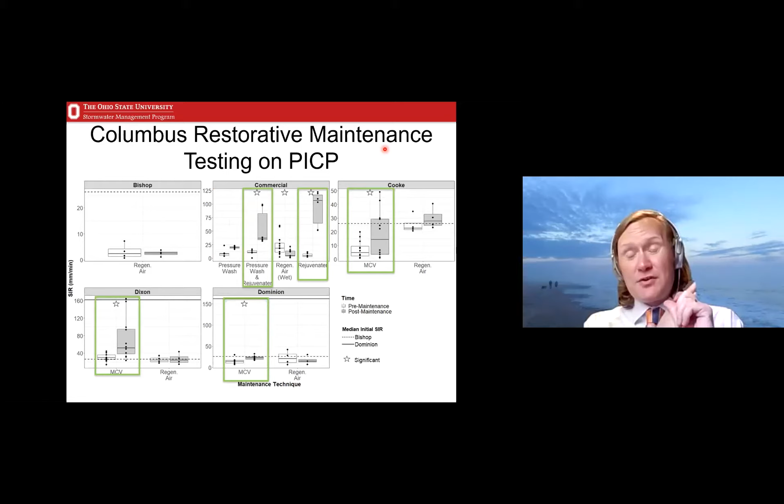Any sort of vehicle that included pressure washing and vacuuming together, so the rejuvenator and the machine cleaning vehicle, abbreviated here as MCV, they all improved the pavement hydraulics significantly. So we really think that those types of vehicles are very good for restorative maintenance of highly clogged pavements.

Regenerative air street sweepers, we tested on these pavements. These pavements were actually decently clogged at the point at which we got to them. And the regenerative air street sweepers really didn't work all that well for clogged pavements. They're fine for routine maintenance, but they don't work great for restorative, which is what we were really trying to test here.

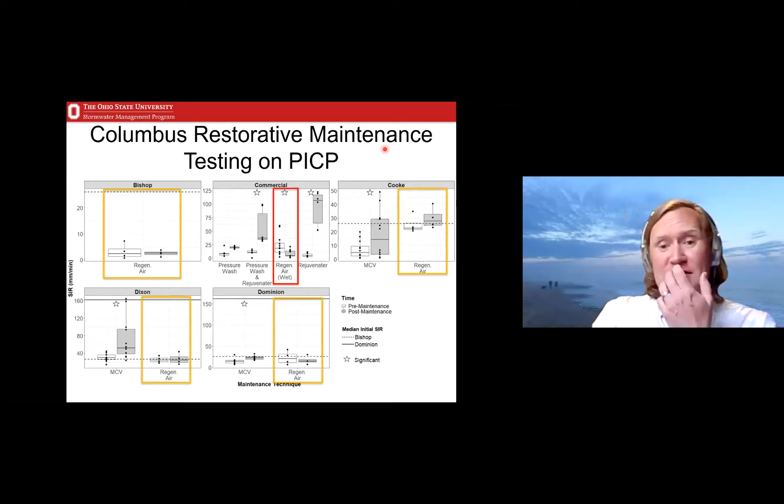The last point I want to make is this one regenerative air test where we actually saw a decline in surface infiltration rate after maintenance. We saw about roughly half the surface infiltration rate after maintenance. And you might ask, why would we see a reduction in the pavement hydraulics? So I'll show you a picture of when this maintenance was done, and a short video as well.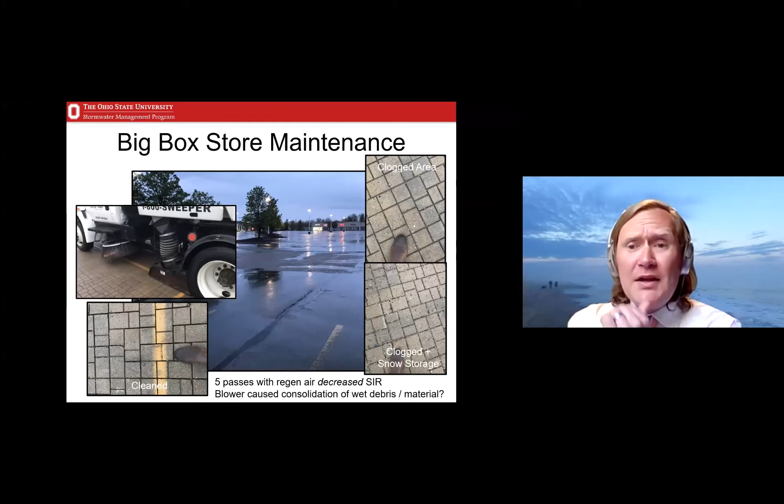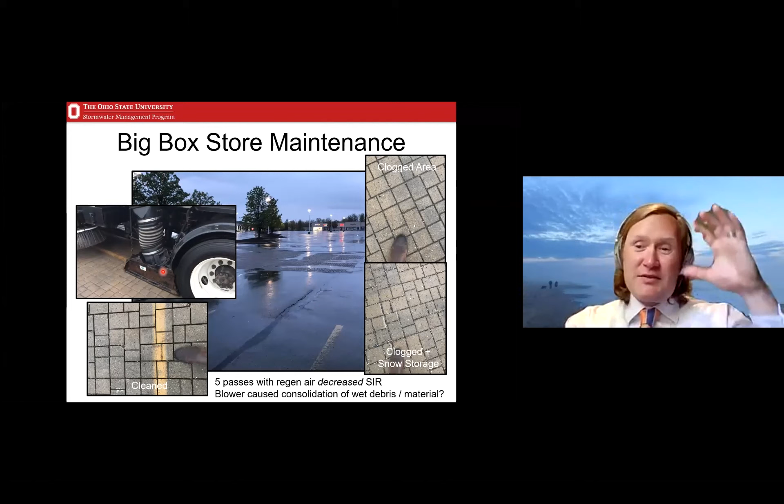So you can see the street sweeper here. This is a regenerative air street sweeper, applying suction to the pavement surface. One of the challenges in the picture you see is that the pavement was actually wet when this was being done. So what we think was happening is the blower may have actually been forcing air down onto the pavement, consolidating some of that wet material that's in the pavement.

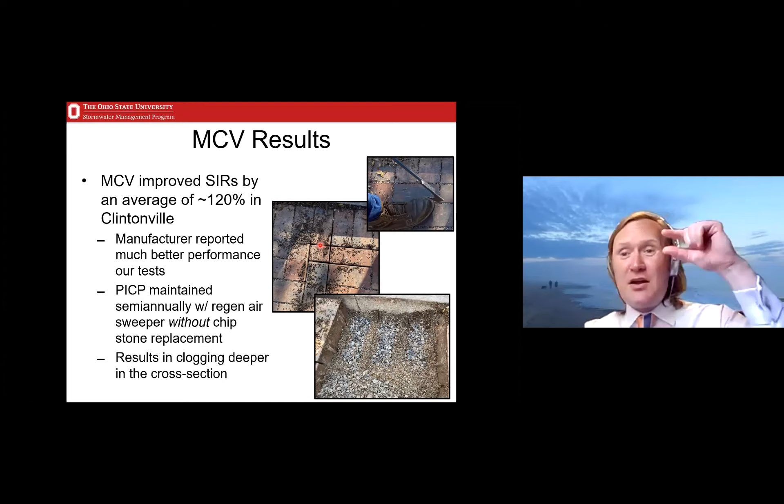That's one of the reasons why we think some of the techniques we studied here in Columbus didn't work as well, because the owner of these pavements, when they did maintenance, didn't come in and put new stone between the bricks afterward. The issue there is that you end up with an air gap right below the pavement surface, and then the clogging material goes deeper and deeper each time you maintain. If you don't put new stone in, the clogging material goes deeper and deeper, and it becomes harder and harder to remediate.

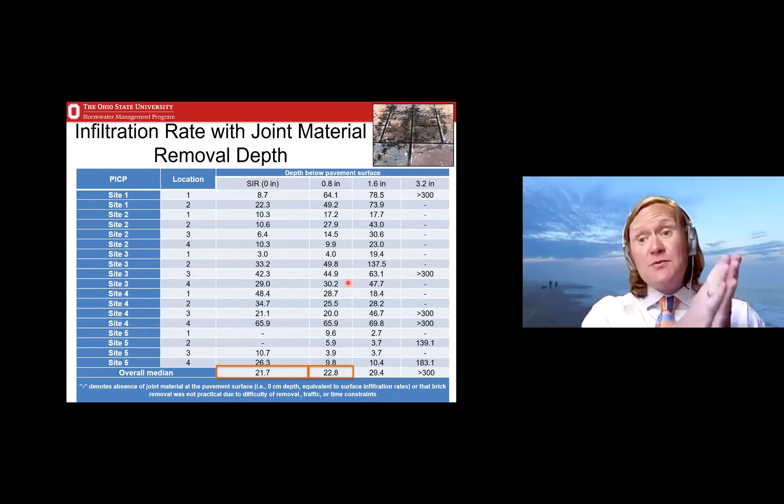I'm going to move through this slide quickly, but just to say that we've measured infiltration rate as a function of the depth of clogging material removed. We measured infiltration rate before removing any material, then removed about 0.8 of an inch, then 1.6 inches, and then actually removed the bricks altogether, which are about 3 1/8 inches thick. The median infiltration rates really didn't increase with only an inch of removal, suggesting that because we hadn't added new chipstone after maintenance, the clogging material was actually quite a bit deeper than 1 inch.

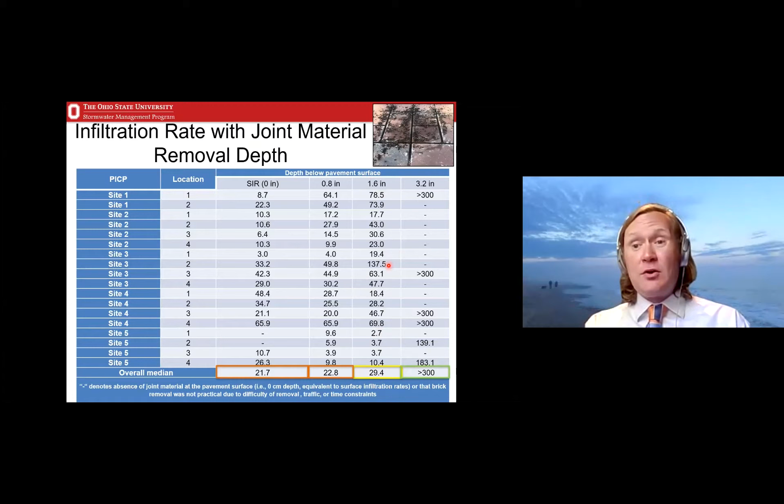So we did see some improvement when we got down to about 2 inches or 1.5 inches of debris removal depth. But it wasn't until we had actually removed the entire brick that we saw new function of these porous pavements. So again, when maintaining, particularly for PICP, where we have this small gravel between the bricks, you absolutely have to re-chip it after restorative maintenance when you've removed some of that chipstone. So what we'd recommend is removing your joint material, your clogging material, to about 1 to 2 inches below the pavement surface, and then coming in with new chipstone immediately after and brushing it in.

Obviously, this is a small scale application. You typically do this with a skid steer loader with a broom on it for a larger scale application.

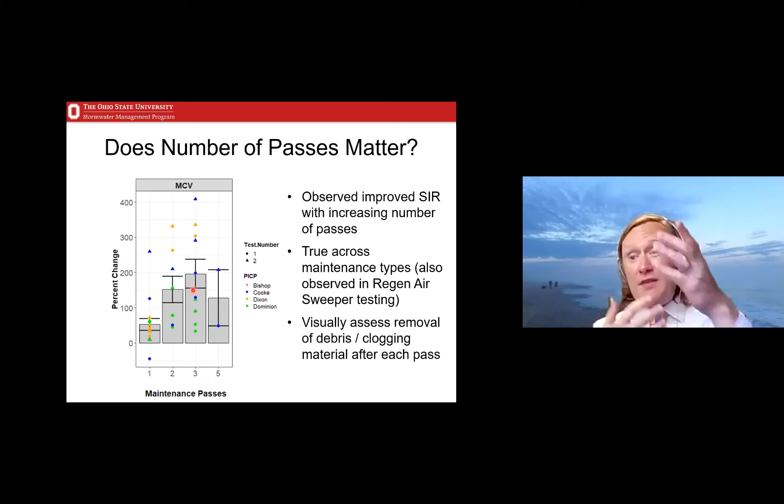Number of maintenance passes do absolutely matter. The more passes you do, the more times you go over the same spot, the more clogging material you remove. So what you want to be careful with is to visually identify how deep the clogging material has been removed. If you've removed 1 to 2 inches, that's what we want to shoot for when doing maintenance. If you start removing more than 3 inches, you could actually undermine your pavement structurally. So visually, you want to have someone look after a pass, take a look at the pavement, see how much has been removed, and then come back through with another pass with whatever your restorative maintenance technique is, to ensure that you've removed enough material.

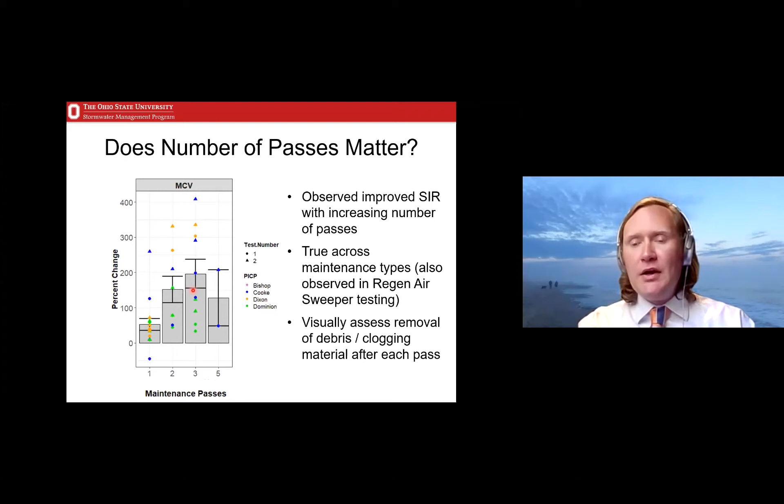For routine maintenance, this really is not important. This is just for restorative maintenance where, again, we should be trying to remove some of that material that's been clogged in the pavement profile. So for routine maintenance, we can just move through quite quickly. I think this is only important for restorative techniques.

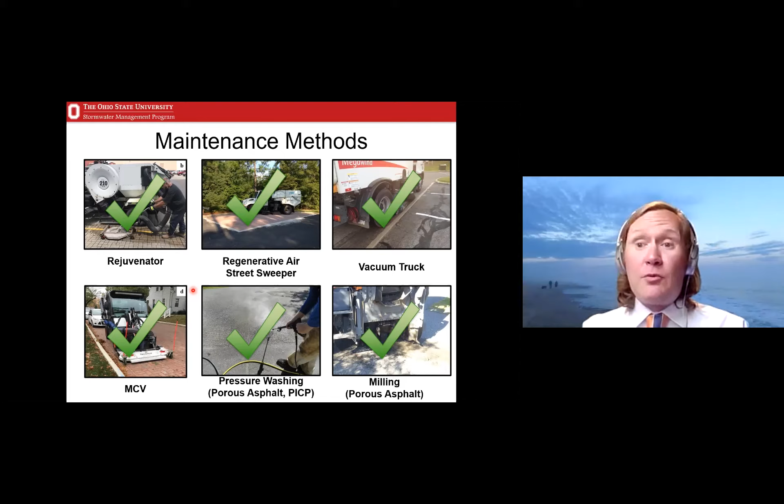So maintenance methods, we think all of the ones shown here work quite well. Regenerative air street sweepers, pressure washing, even bristle street sweepers for routine maintenance are just fine. And then really you need bigger techniques for restorative maintenance. Something with a large amount of vacuuming, like a vacuum truck, or the combination of pressure washing and vacuuming, I think is where the industry is headed for restoring the function of systems that are heavily clogged.

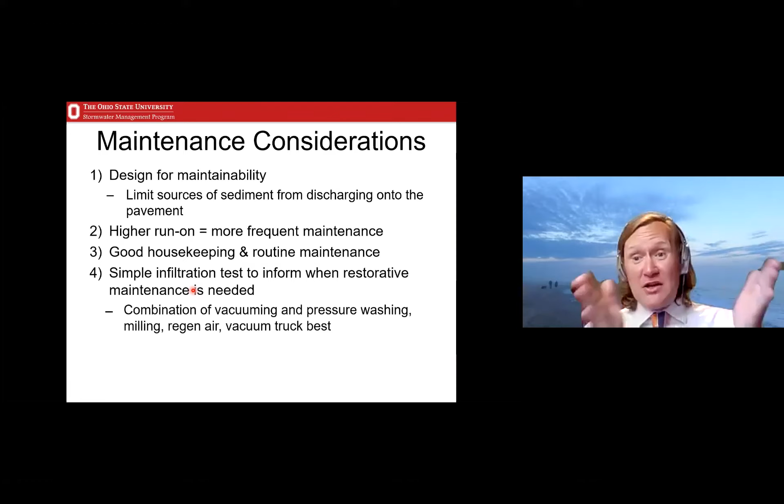So maintenance considerations: design for maintainability is absolutely important. Limit your sources of sediment. Higher run-on is going to mean more frequent maintenance. So thinking about maintenance during design is absolutely critical in my opinion. Keep up with your good housekeeping and routine maintenance, and have a plan for that from the start. Use the simple infiltration test to schedule your major, non-routine maintenance. And again, the market is really burgeoning with new devices and new techniques, so I think there's a lot more to come in this area to try to understand how we can best maintain these systems.

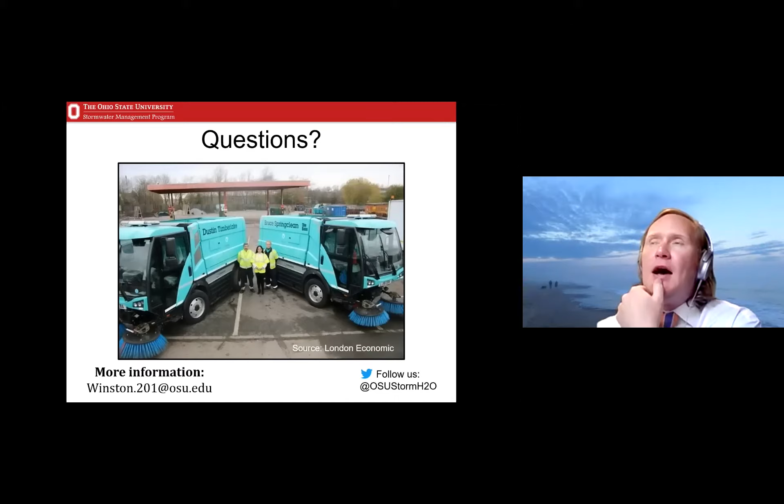The other piece of the question was about the pave drain type product, the one without gravel in the interstitial spaces. I don't have a lot of experience with that, I'll be upfront with you. We don't have a lot of applications of it in Ohio, and we didn't in North Carolina when I was there either. I've always had some concerns about the ability for clogging material to get down into it, and those bricks are something like 6 inches thick. So I think others may be able to speak better to the long-term maintenance needs of those, given my lack of experience with those pavements.

Okay, so the next question is from Mike Trojan. Does the type of maintenance differ with the material being removed? I'm specifically thinking about organic debris, which could get ground up and make things worse if cleaning is not done correctly. Good question, Mike.

What we've seen here is that there are two times of year that are most critical to do maintenance on porous pavements, and I think they'd be very similar in Minnesota, given that your climate is maybe colder than ours but still has winter de-icing. Those times are autumn, when all that organic debris tends to get ground up, so we usually recommend pre-winter maintenance, the end of autumn, early winter timeframe, as a key time to get that organic debris out.

And then we recommend doing maintenance immediately post-winter, because we see a lot of sediment and grit created from the friction applied by plow blades in the wintertime, and snow melt tends to be very dirty. So if we're going to schedule routine maintenance, a minimum twice a year, we'd recommend early spring and late fall. We think those are the optimal times if you're only going to do two routine maintenances in the year.

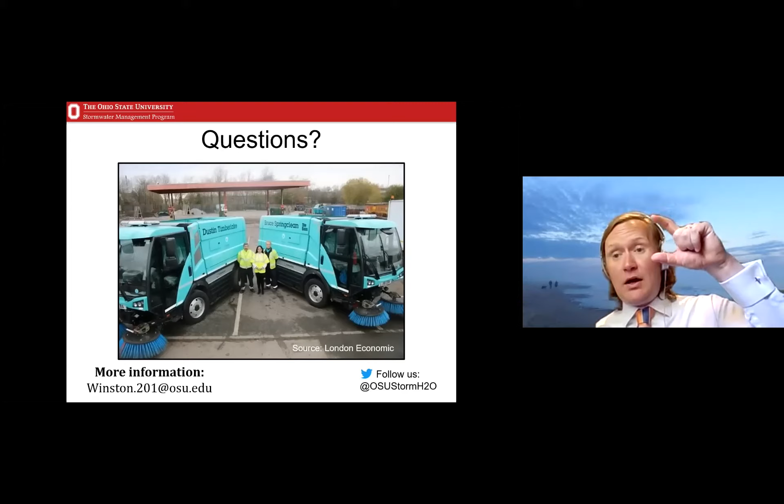It's a great question, but I've never done it. So I would imagine—typically when you mill off the upper layer of a hot mix asphalt street, you have to come in with a binder to bind the base course to the new wearing course. That binder, if you had to do that with porous asphalt, could potentially reduce the ability of water to move through the pavement. So it's not something I've ever done, Dan.

We can just tell you that if you mill it, it works. For restorative maintenance, I think we still need to close the loop on how we bring the final grade of the street back up to where it originally was.

Okay, we have one more question I've been saving to finish this, from Ross Bittner. His question is: do you have a sense for the cost of maintenance? Could you compare the marginal cost of maintenance versus the run-on ratio decision to find an optimal lifecycle cost benefit? He's not asking for much.

That's right, no, it's a great question. My general take is that maintenance costs are a relatively small fraction of the upfront costs to construct the facility in the first place. I've actually been floored when we've worked with private companies locally to maintain porous pavements for our experiments, at how cheap it is.

We had them on site recently for an hour, and it was like $120. It's not tremendously expensive to get a private company to do street sweeping—that's what they're in the business to do, that's what they do all day. Particularly if these systems are in a downtown area already being swept, the marginal increase in cost may be very low. But I'd estimate maintenance costs to be, let's say, 1 to 5% of initial construction costs per year.